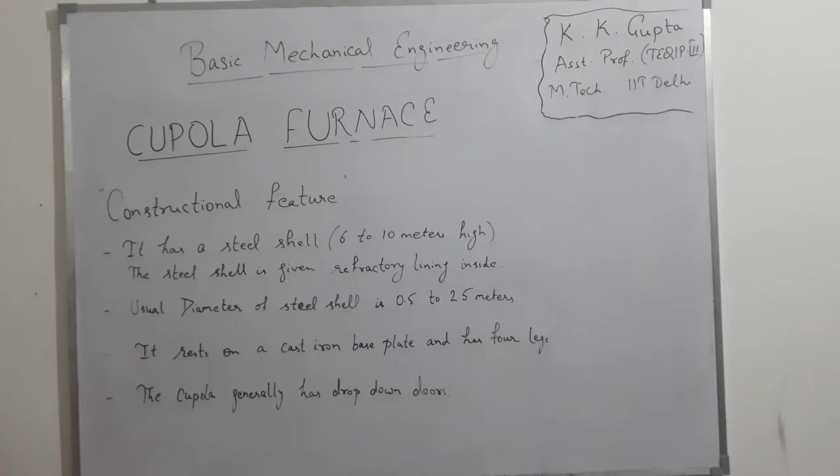At the bottom there is a tap hole to remove molten metal. There is also a slag hole to remove the slag. The charge is introduced into the furnace body by means of an opening approximately halfway up the vertical shaft. The charge consists of alternate layers of the metal to be melted, coke fuel and limestone flux.

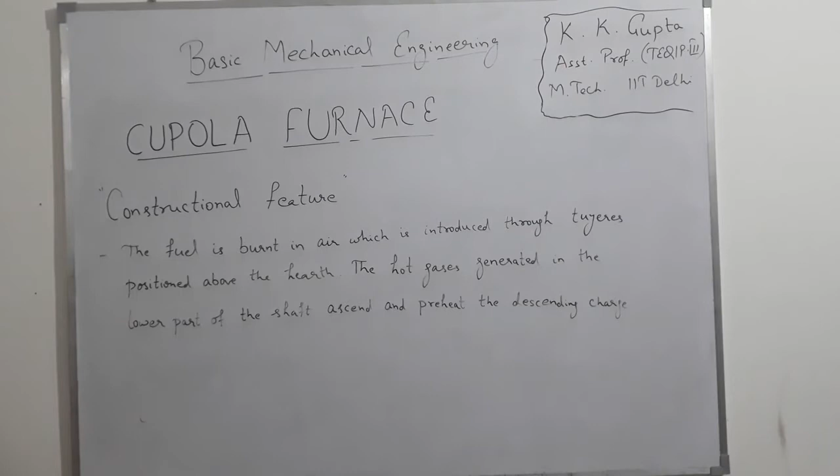The fuel is burnt in the air, which is introduced through tuyeres positioned above the hearth. The hot gas is generated in the lower part of the shaft, ascends and preheats the descending charge. Construction details of cupola are shown in the figure. You guys can pause the video and draw the diagram.

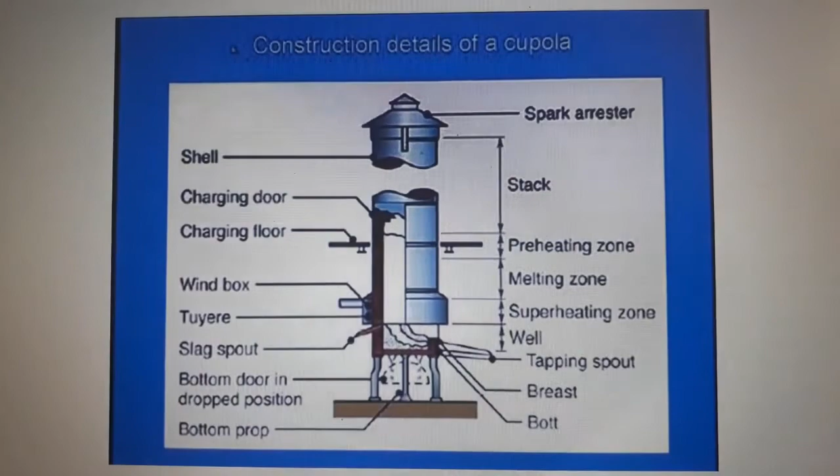Now various zones of cupola furnace. First is well: the space between the bottom of the tuyeres and the sand bed inside the cylindrical shell of the cupola is called the well of cupola. As the melting occurs, the molten metal gets collected in this portion before tapping out.

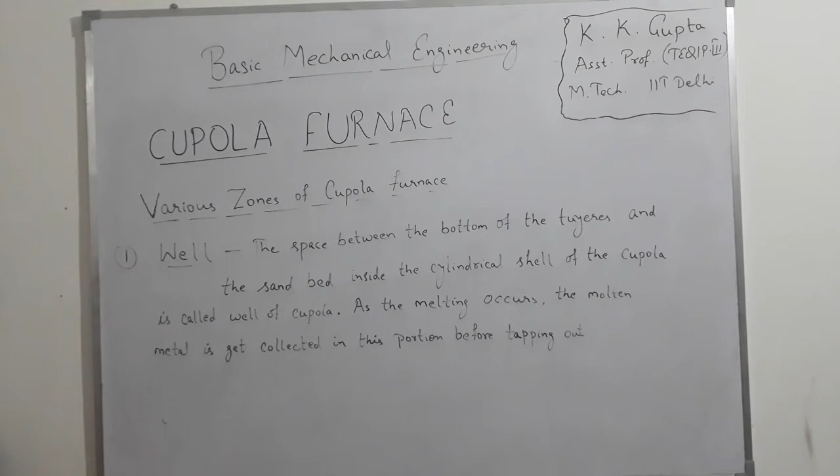Second zone is combustion zone. It is also called oxidizing zone and it is also called superheating zone. It is located between the upper level of the tuyeres and a theoretical level above it. The total height of this zone is 15 cm to 30 cm. A temperature of about 1540 degrees Celsius to 1870 degrees Celsius is achieved in this zone.

Few exothermic reactions take place in this zone. These are represented as carbon plus oxygen gives carbon dioxide plus heat, silicon plus oxygen gives silicon dioxide plus heat, manganese plus oxygen gives manganese oxide plus heat. The combustion actually takes place in this zone by consuming the free oxygen completely from the air blast and generating tremendous heat.

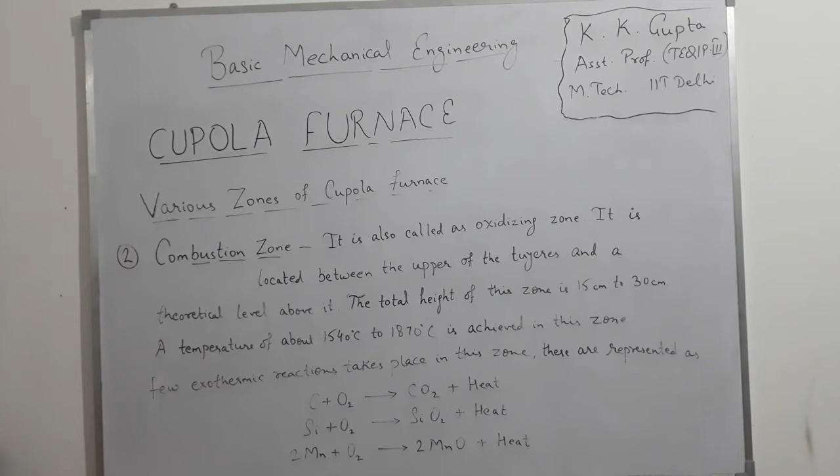Third zone is reducing zone. It is also called protective zone, which is located between the upper level of the combustion zone and the upper level of coke bed. The temperature drops to 1200 degrees Celsius at the top of this zone.

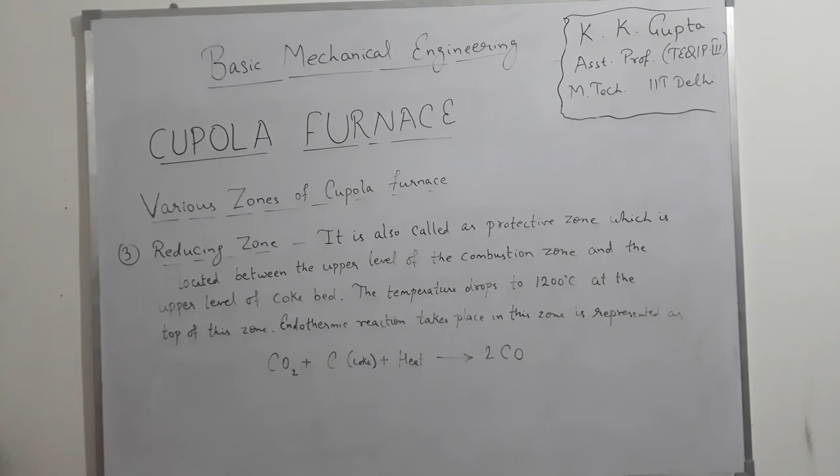The endothermic reaction that takes place in this zone is represented as carbon dioxide plus coke plus heat gives carbon monoxide. Since endothermic reaction takes place in this zone, the temperature decreases from 1800 to around 1200 degrees at the top of this zone. Combustion zone plus reducing zone is also known as superheating zone.

Fourth zone is melting zone. The lower layer of the metal charge above the upper layer of the coke bed is termed as melting zone. The metal charge starts melting in this zone and trickles down through the coke bed and gets collected in the well. The reaction that takes place in this zone is iron plus carbon monoxide gives iron carbide plus carbon dioxide. It means 3Fe plus 2CO gives Fe3C plus CO2.

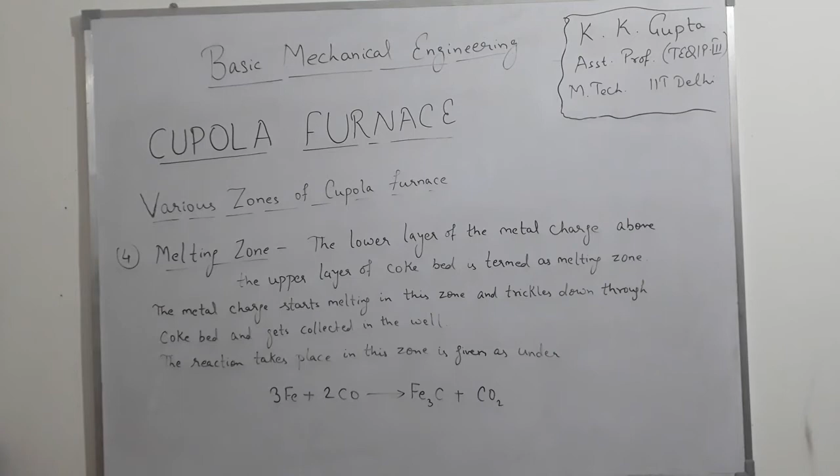Fifth is preheating zone. Preheating zone starts from the upper end of the melting zone and continues up to the bottom level of the charging door. This zone contains a number of alternate layers of coke bed, flux and metal charge. The main objective of this zone is to preheat the charge from room temperature to about 1100 degrees Celsius before entering the melting zone. The preheating takes place due to the upward movement of the hot gases.

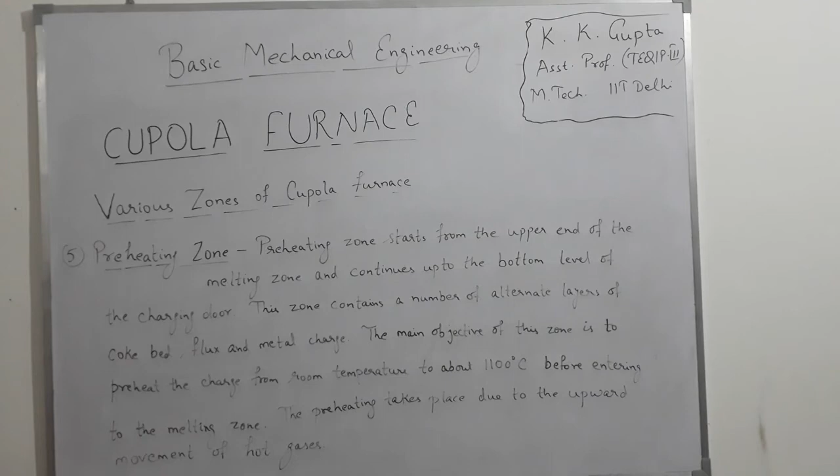Sixth zone is stack. The empty portion of cupola above preheating zone is called stack. It provides the passage for hot gases to go to the atmosphere from the cupola furnace.

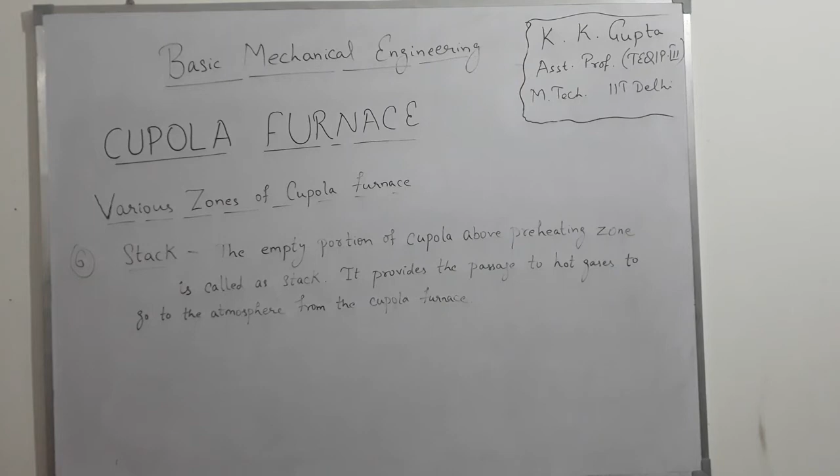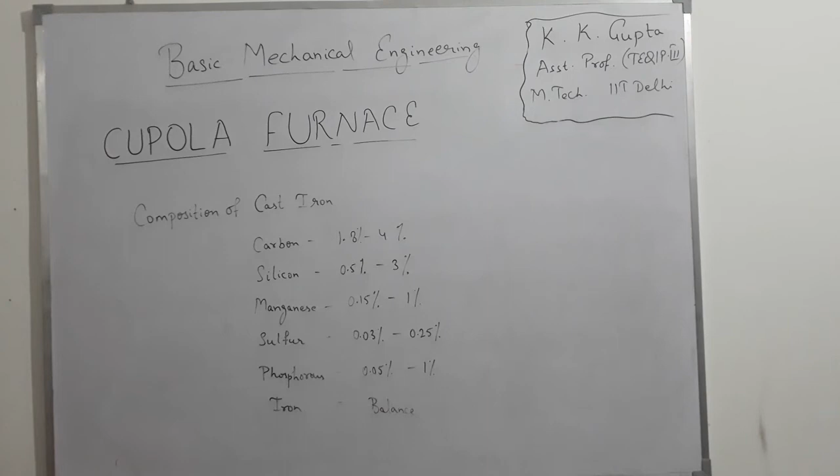You can note down the composition of cast iron. Carbon is 1.8% to 4%, silicon is 0.5% to 3%, manganese is 0.15% to 1%, sulfur is 0.03% to 0.25%, phosphorus is 0.05% to 1%, and the balance is iron.

Steps in operation of cupola. First one is preparation or repair of refractory lining. Second, lighting and burning the coke bed. Third, charging. Charging means metal plus coke plus flux. Fourth, melting, meaning all the zones, combustion zone, reducing zone, melting zone and preheating zone, will take place in this. Fifth, tapping and slagging, and sixth is dropping the bottom.

Advantages of cupola furnace. First one is simple construction. Second, low initial cost. Third, simple to operate. Fourth, relative to other furnaces, very low operating cost. Fifth, offers very high melting rate up to 35 tons per hour. Sixth, it can be operated continually. Seventh, electric power is not required.

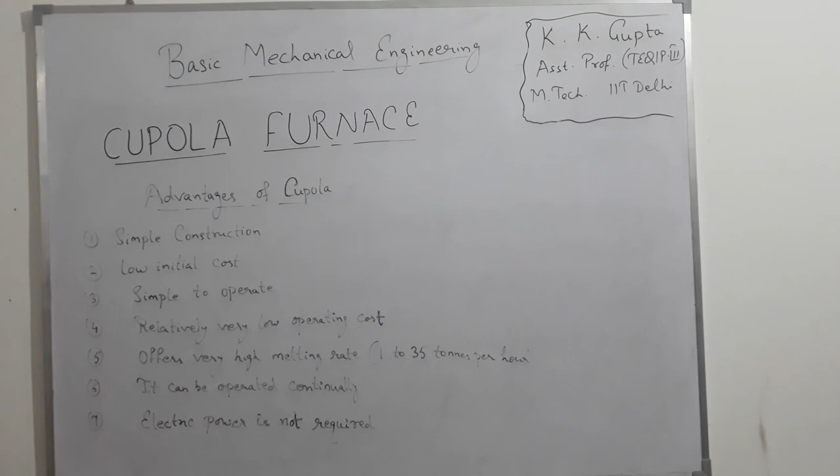Disadvantages of cupola furnace. First is close temperature control is not possible. As we discussed in the combustion zone, the temperature range of 1540 degrees Celsius to 1870 degrees Celsius is achieved. It means it is a range of temperature that we achieve, not a close temperature control.

Second is carbon and sulfur pickup takes place during melting. In the melting, carbon and sulfur are picked up by the metal charge. Because of that, the composition of cast iron is affected. Third is loss of iron, silicon and manganese takes place during melting because of their oxidation. And fourth is environmental pollution takes place.